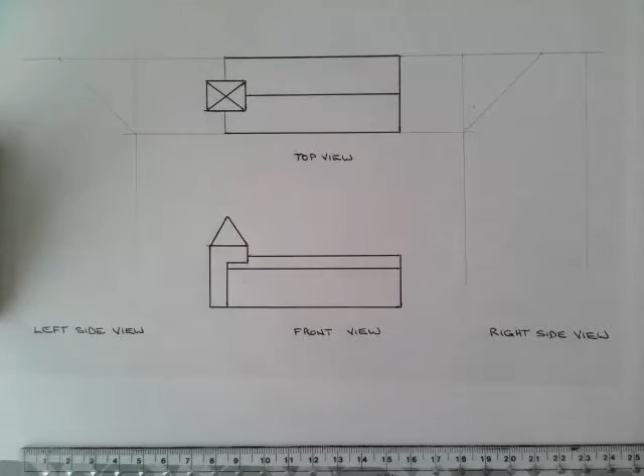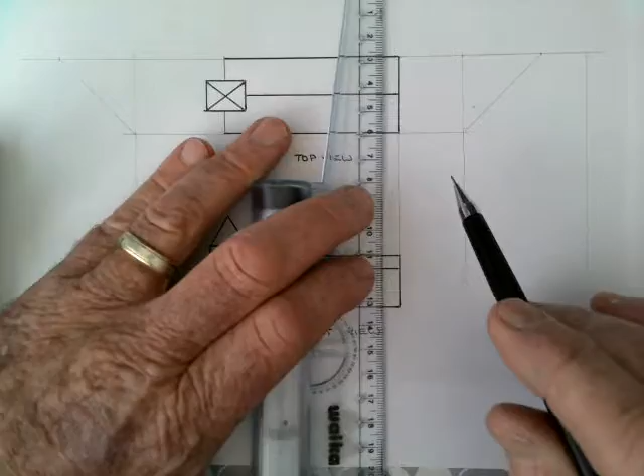So I have transferred this drawing to a very small one here, and what I'm going to have to do is just show you that when we have a top view, just as we have here, and we have a front view, it is directly below it. So all of these drawings coordinate. And what I'm going to do is just quickly show you, if I place my ruler against this side, that the top view is directly above the front view. Conversely, the front view is directly below the top view.

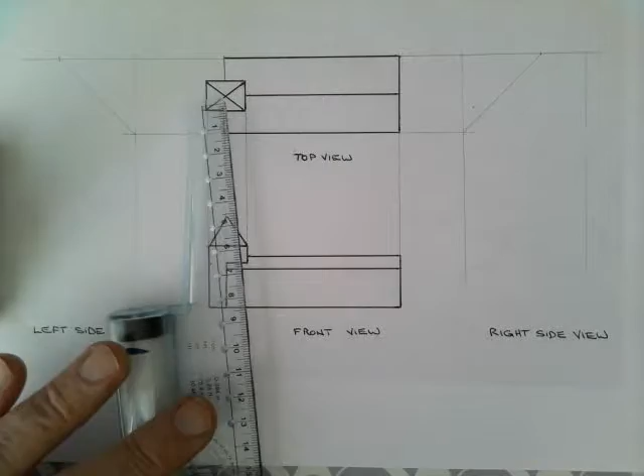Just some aspects of it. Here is the front of the building. And here is the end of the clock tower. Now, they're just parts of the drawing. We can see that we've already been given the height. This part here, the top view, the front view. The top view is directly above the front view, the front view directly below the top view. And we make sure we label these views. This is top view, this is front view.

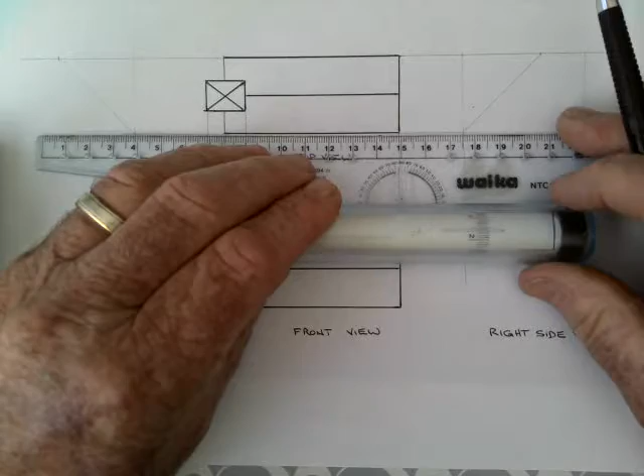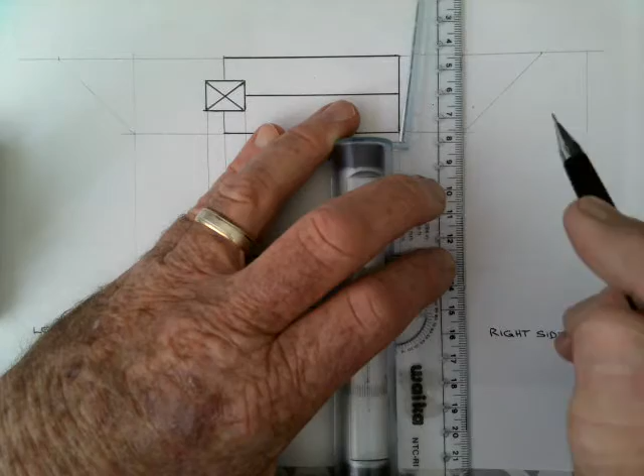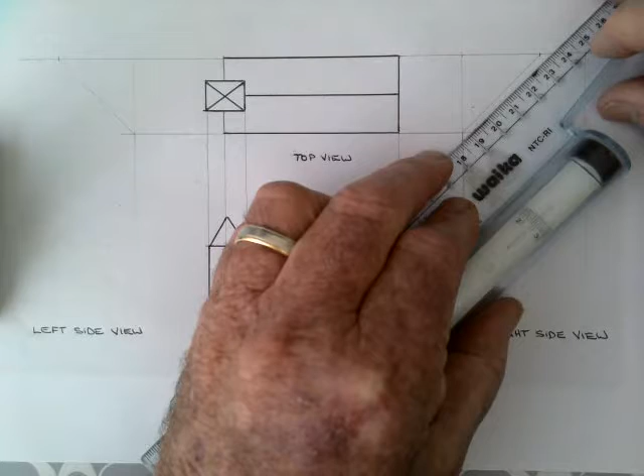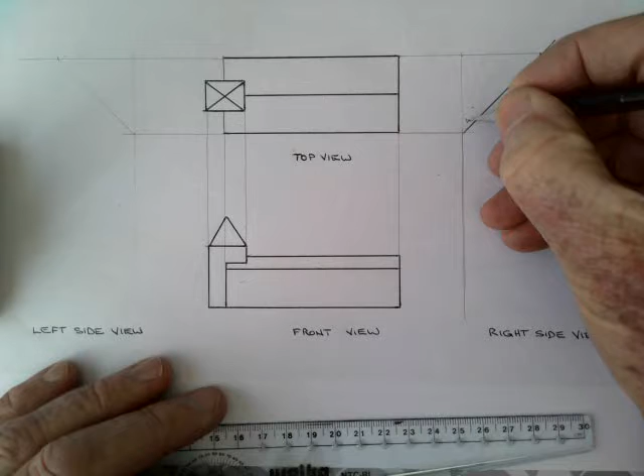Now, I'm going to do this just by simply measuring the height of that. That happens to be 31.5. Just going to draw across here, a point there. And so what I've got is a line here, and this angle is 45 degrees. I'm going to firm that in, just so that you can see the reference point that I'm working to. So I've got the front of the building, this here, I might call that A. I'd call this part here, if I could see it, A. This angle here is 45 degrees. Just so that you can see that.

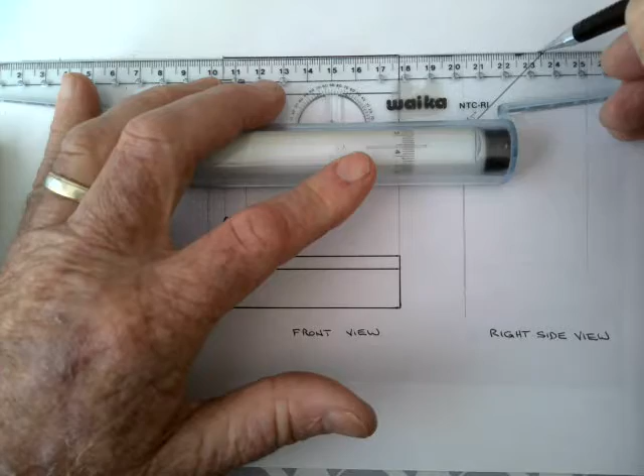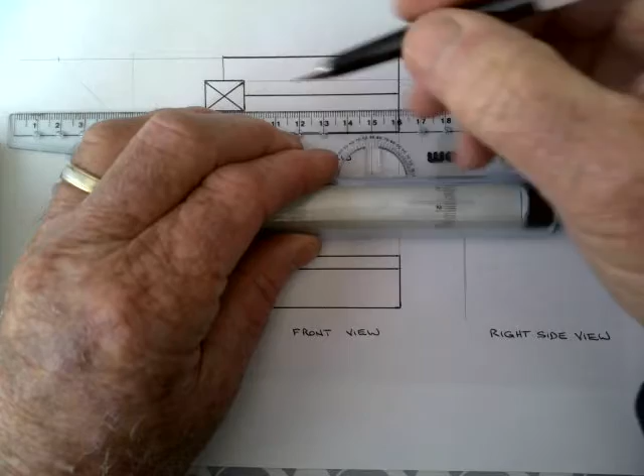I then project all the significant lines from the top view across to this line of 45 degrees. So here is my back edge. And we usually put all of these lines in a very, very faint line, which we call a construction line. So I'm just going to go across there lightly until I hit the 45 degrees. Here is the ridge of the building. Go across there faintly. The other side of the clock tower, go across to there faintly. And the front of the building, which we'd already drawn out here.

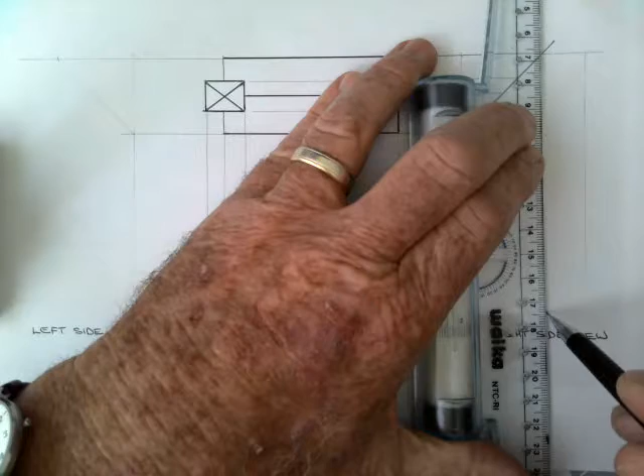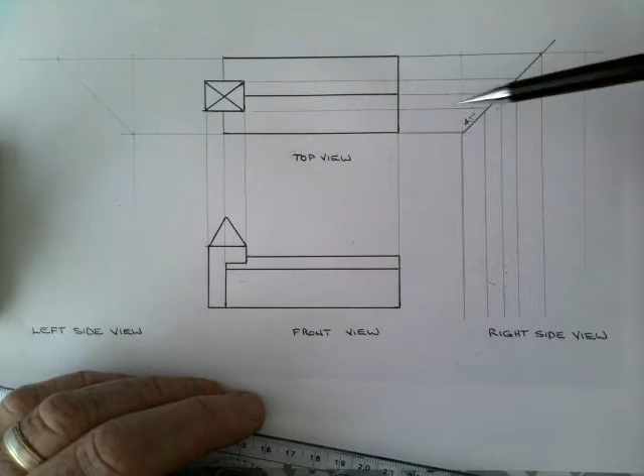Now, when we have each one of those lines in place, we then drop those vertically. So again, just get my reference. There is a line there. I'm just going to bring that down vertically with a faint construction line. The next one I can see, faint. There. And the last one. So I have each part of this drawing, and I've projected it across to this 45-degree angle.

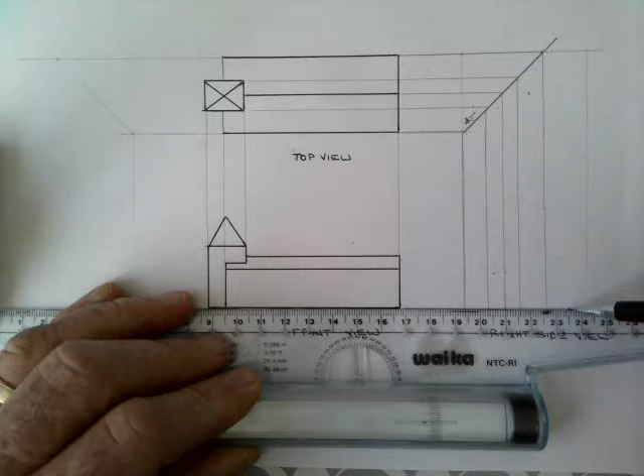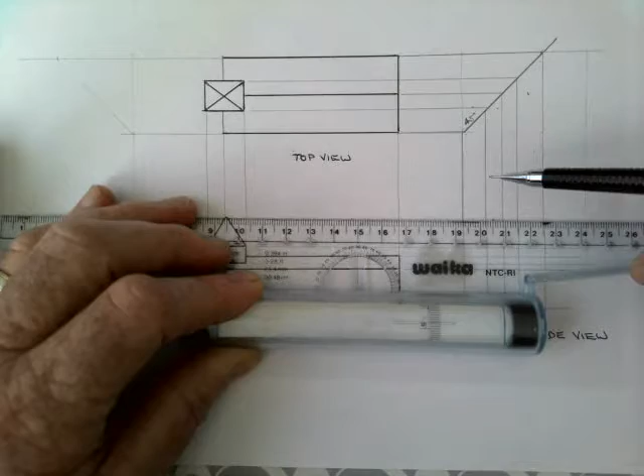I then take the lines of the front view and I project those across. So here is the base of it. Project that across. Here is the top of the wall. Project that across. Here is this part of the ridge line. Project that across. The top of the ridge. This part. And the very top of the clock tower. Project that across. So I have this maze of lines.

Now, it's quite easily understood. If I follow one line, and in this instance I'm going to follow the top of the clock tower, that point there, follow that across, comes across to here, follows it down. So there is the top of my clock tower. I'm just going to put a little dot there so you can see. Here is the side of the clock tower, bring it down. The side of the clock tower is there. Here's the other side of the clock tower, bring it across there. We've got one across here, across to here.

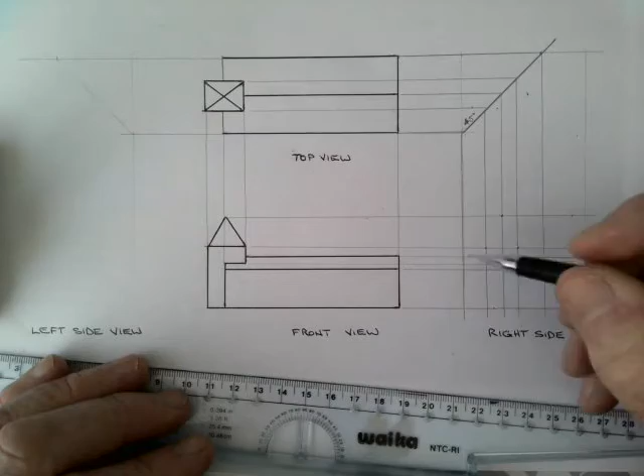Now this is the right side view. Now if we were looking from here, we couldn't actually see the front of the clock tower. So we've got those three parts of a clock tower. We've got the side wall. Now the side wall comes to here and here. So I'm going to firm those in. This line, I'm going to firm it in.

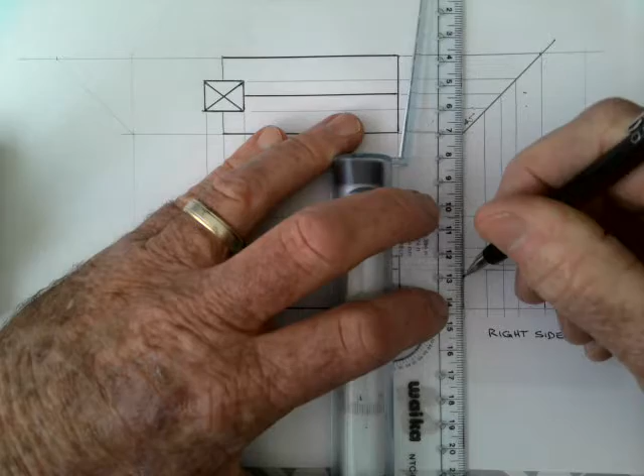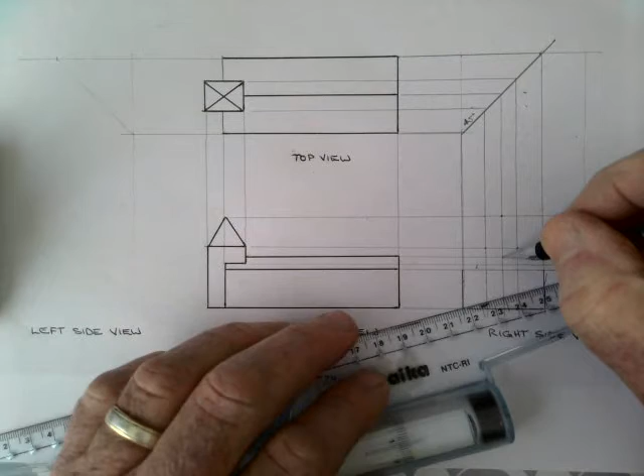This is the base of the building. I'm going to firm that in. And we can see that our roof goes from here across to this point in the middle. So our roof's coming to here, which is there. So I'm just going to put that line in lightly because some of it will disappear.

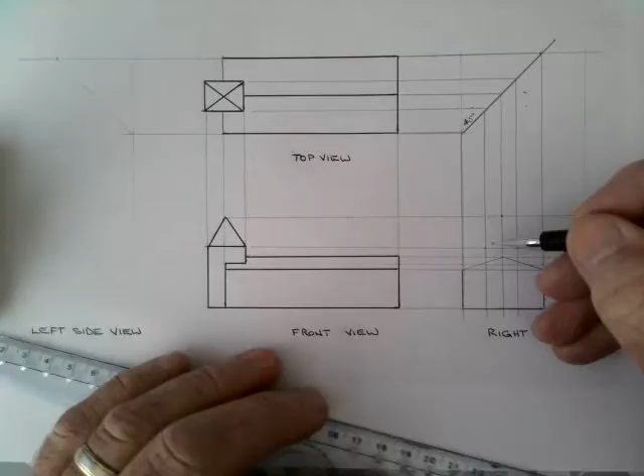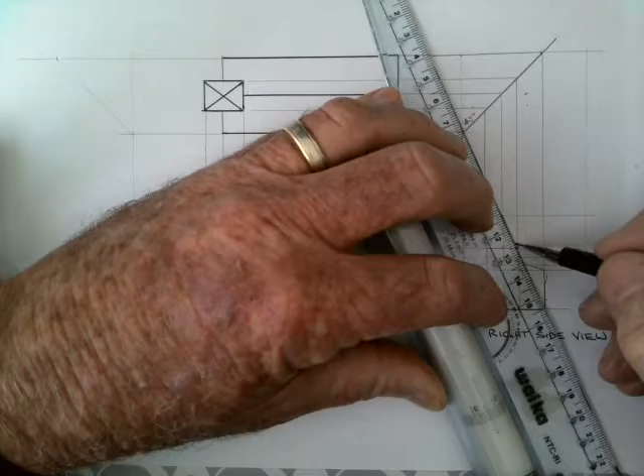There. Same on the other side. There. Our clock tower is from here to here, so I'm going to put that in. Put that in. And finally, the pointed part of the clock tower is going to here and to here. So that we drop all these parts in.

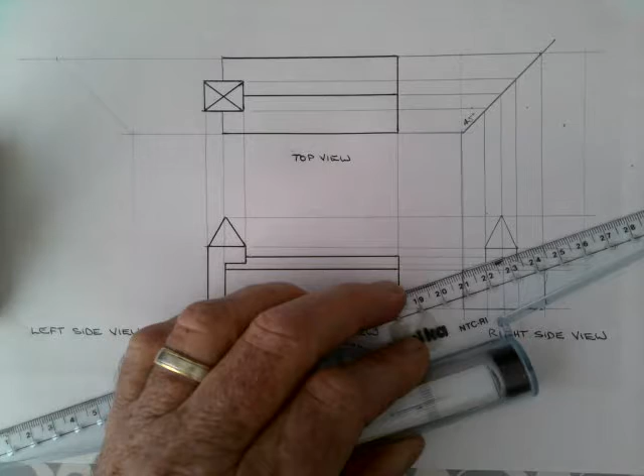And in this instance, the roof is going to cover the back of the clock tower, so this line can go in. Now I'm going to firm these in with a pen just so that you can see it quite clearly. Normally we don't use a pen, obviously, in this area of the graphics. So we've got a line here, we've got a line here, a baseline,

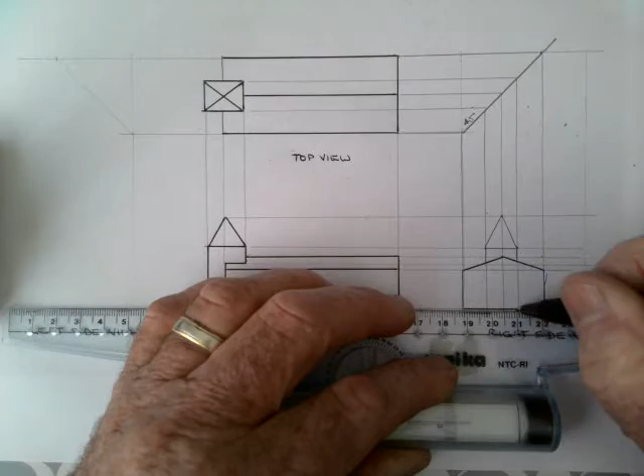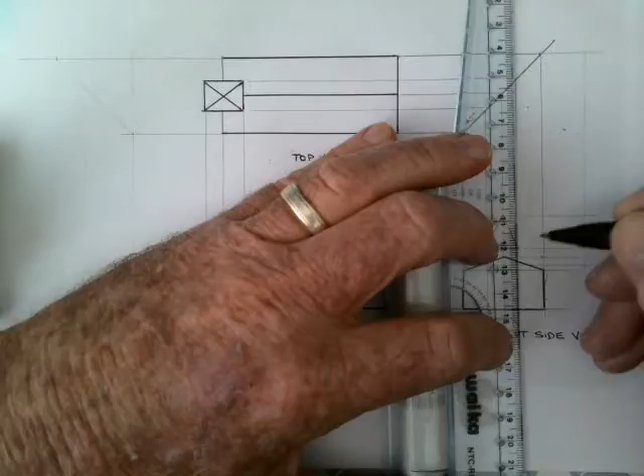side of the building, side of the building. Our clock tower is rising directly above that. Hopefully you could see that the way in which we would see our clock tower properly is from the left side view.

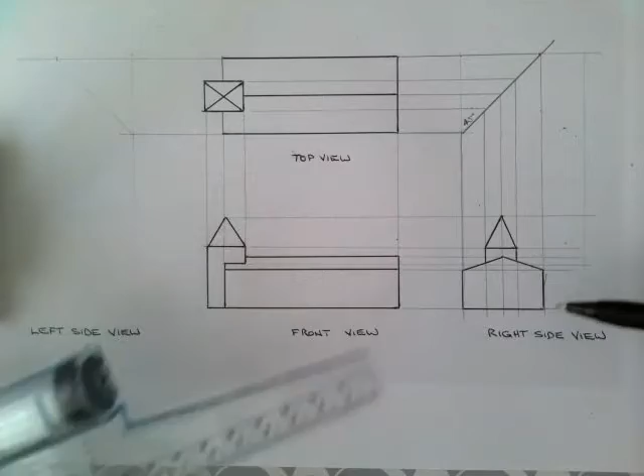Now, as you can tell, I've got a lot of construction lines in here. I'm not going to worry about erasing them. I'm going to leave it. These are light construction lines. I'm going to just firm in my lines, which I've done with a darker unit. And so this is the right side view.

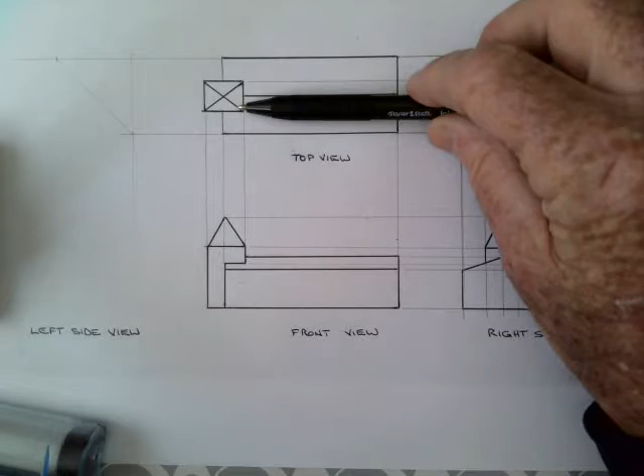This is the view looking from the right, and so part of the clock tower is going to be cut off. Now, to see the other part, what I would have to do is construct these lines to the other side. So the left side view, I'm just going to move my camera out a little bit, is to do exactly the same here. So my front view is just going to be drawn across. All the aspects of the front view go across.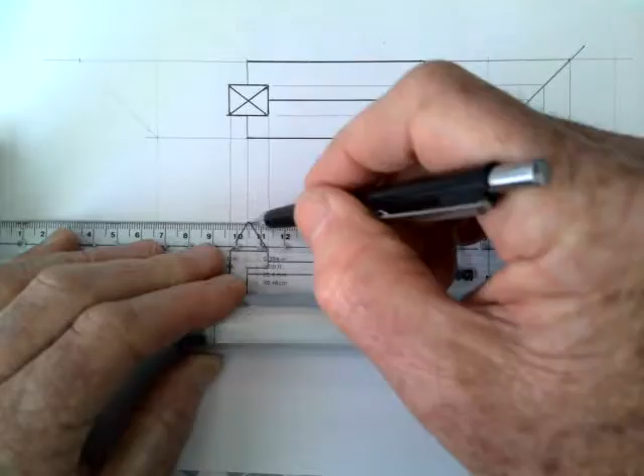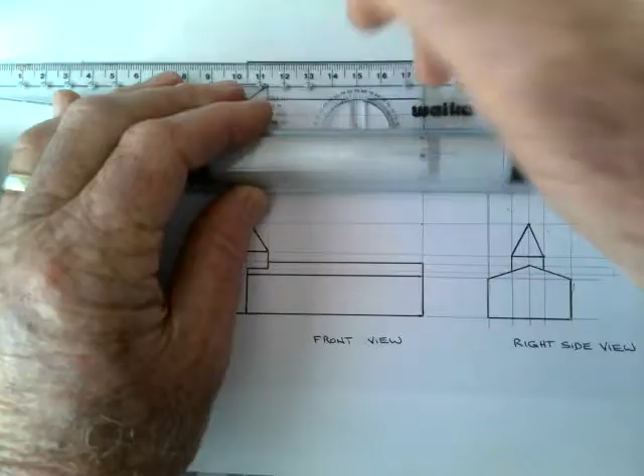There is the top of the roof going across. Top of the brickwork, I imagine, for the clock tower or the timber work. So we have these construction lines travelling out to the left. We do exactly the same in the top view as what we have done with the right side view. We project each of these lines outwards. So here is the other side of the building, coming out here, coming out to this point here.

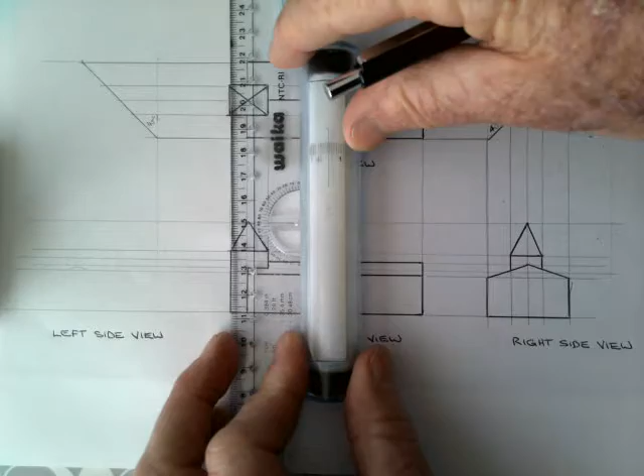Again, I've constructed a line of 45 degrees at this point, and I'm going to firm that in just so that you can see that angle is 45 degrees from the vertical. I construct each one of my lines out to that 45 degree line. And then I construct those downwards, and then I join the dots again. So I'm just going to take a reference off this line, this vertical line. Again, you can do this with set squares.

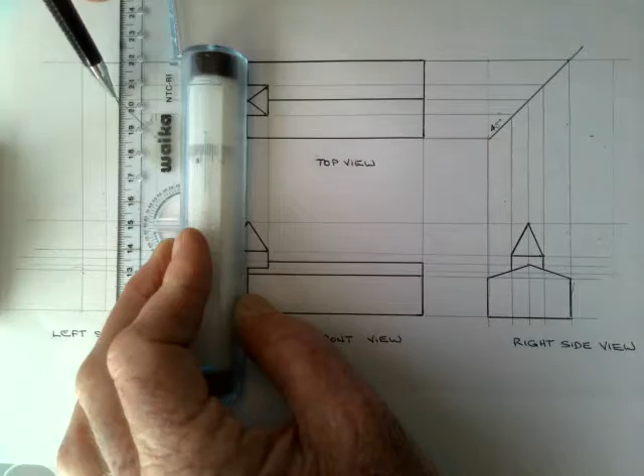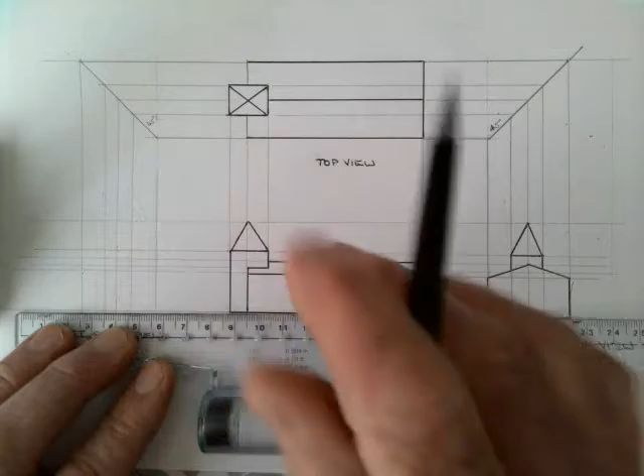Project each line downwards. So that we have the last line coming in here. This is going to be our front. So we're looking from the left side. So we're looking at the building from this side. This part here, if we're looking at it, we see the full front of the clock tower. So I'm going to draw that in first.

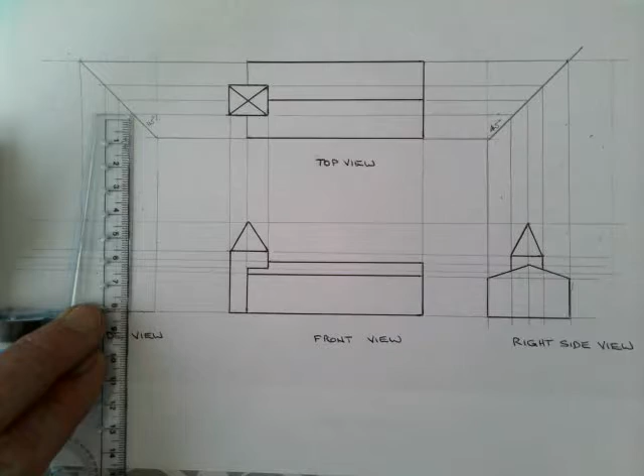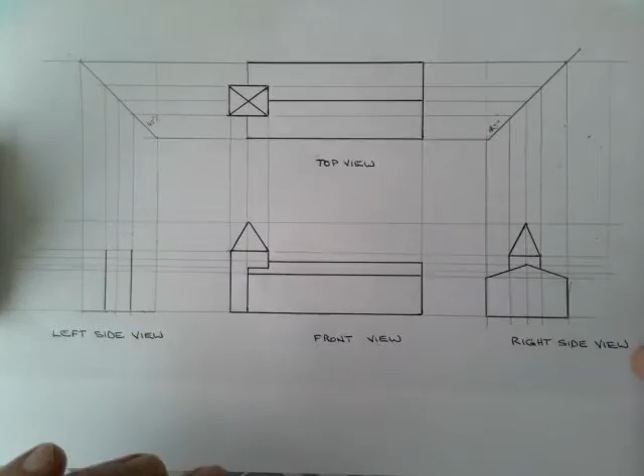Here is the line of the clock tower here. Here is this line. Now I'm pretty confident, so I'm going to firm that line in just so you can see it. Here is the other side of the clock tower. There is the top of the construction work before the actual pointy part starts. We have a line going across here.

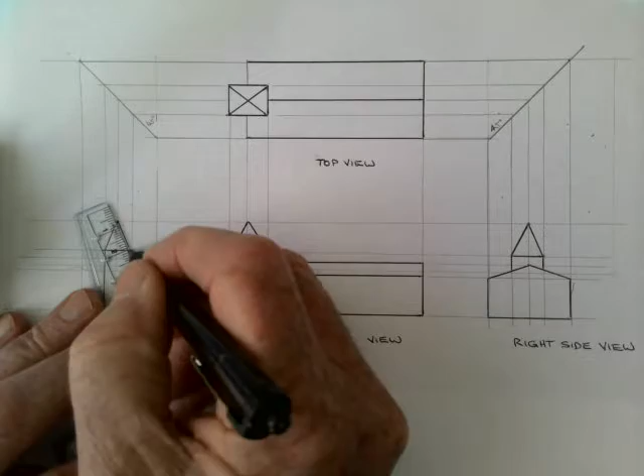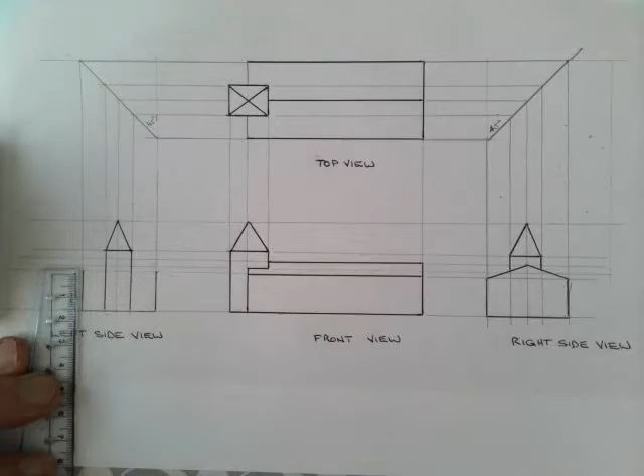We have an angle here going to the top. An angle here going to the top. This is our roof line to this part here. So that we can firm those in. Just there and there. And we can see here is the top, it goes to this point here. We can put those in. So they travel to that point.

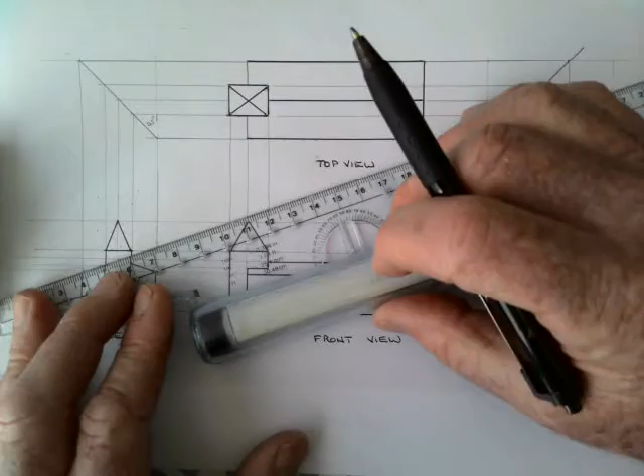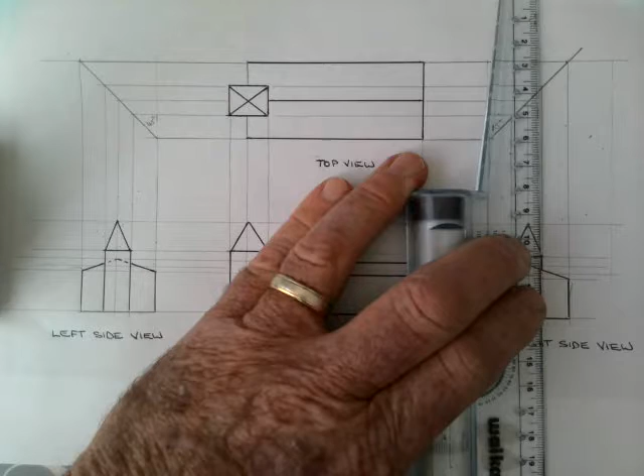And basically, now if we wanted to, we would just put this in as hidden detail. Usually what we do in orthographic drawings is put parts in as hidden detail, and they are a short broken line. Just a very small line like that, short broken line. Hidden detail. In this part on the right side view, we would show or indicate the remainder of the clock tower, the pointed part, as a broken line or a hidden detail line.

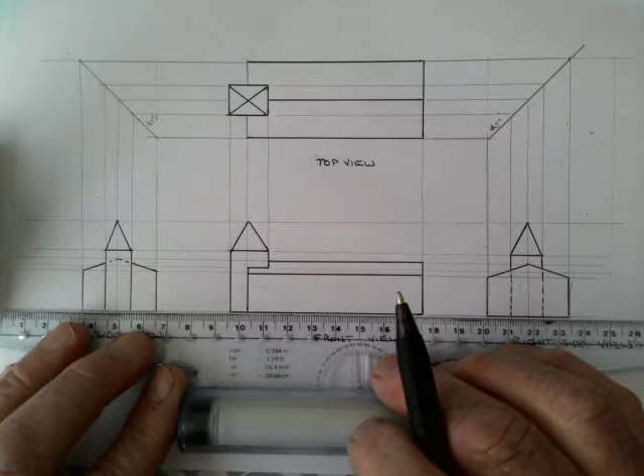So that gives you an indication of where we are situated with our left side view, our right side view, a very basic understanding of the types of lines. As I said, these very faint lines which we have here, which I'm not erasing, they are construction lines. They're a very faint line, very thin line. These parts here are a firm line, okay?

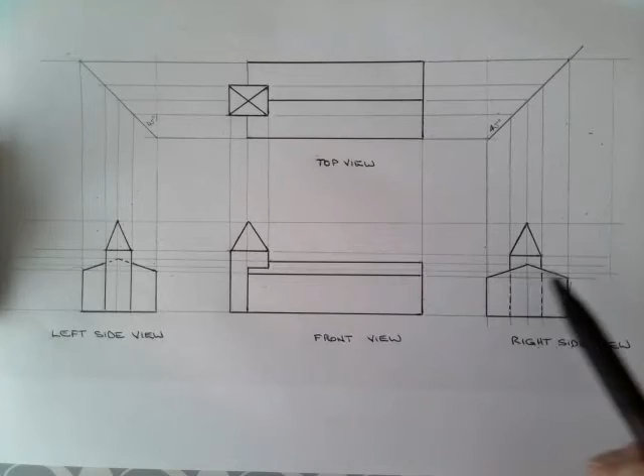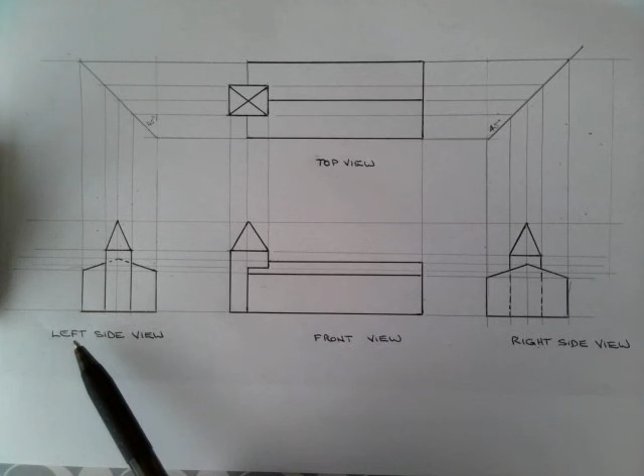So as long as we start to get our construction lines in and map out the whole unit, we've got a fair understanding of our left side view, our front view, our right side view, and our top view. It's important to note, you don't just place the front view or the top view anywhere you like. Top view is directly above the front view. Right side view is directly to the right of the front view. Left side view to the left of the front view. Each of these correlates. Each of these has lines telling it where it must